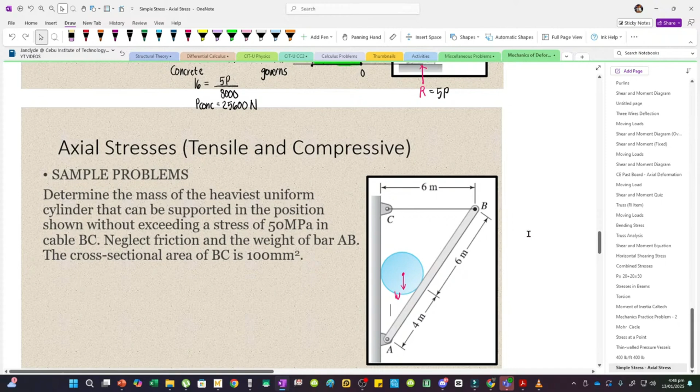So what we'll do first is draw the free body diagram for the cylinder. The cylinder has a point of contact here, and also at this point. The normal reactions for a circular body act at the points of contact. So this is the FBD of the cylinder.

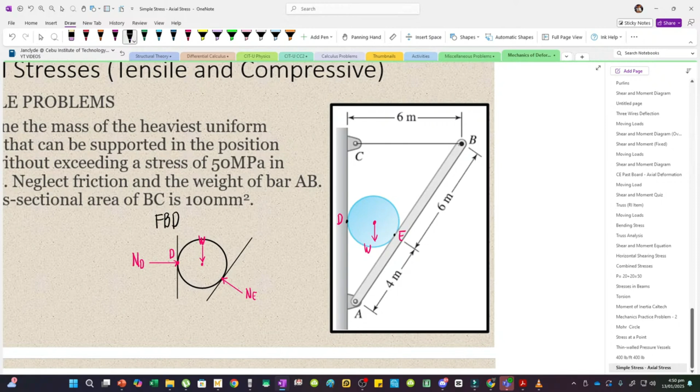So in the FBD of the cylinder, notice that we can get the normal force at point E by summing up forces vertically. To do that, we need to know the components, or the angle of NE.

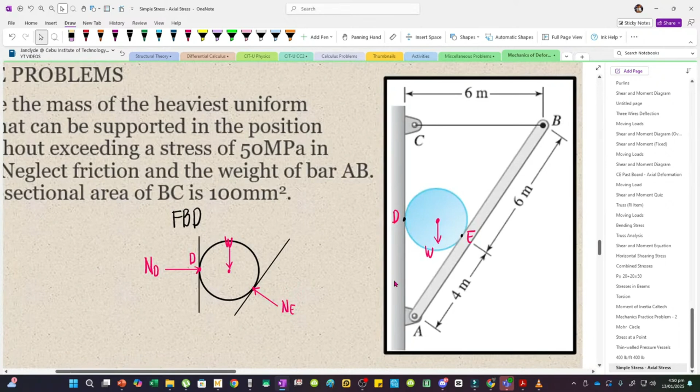Let's draw the inclined member AB again. This is member AB. 6 plus 4, so the hypotenuse is 10.

Let's draw the triangle. The hypotenuse is 10, the horizontal distance is 6.

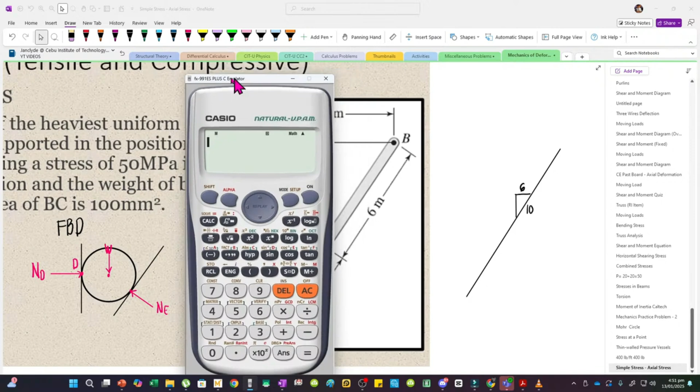And what is the vertical distance? We can get that by the Pythagorean theorem: square root of 10 squared minus 6 squared, we get 8. So this is a 3-4-5 ratio triangle.

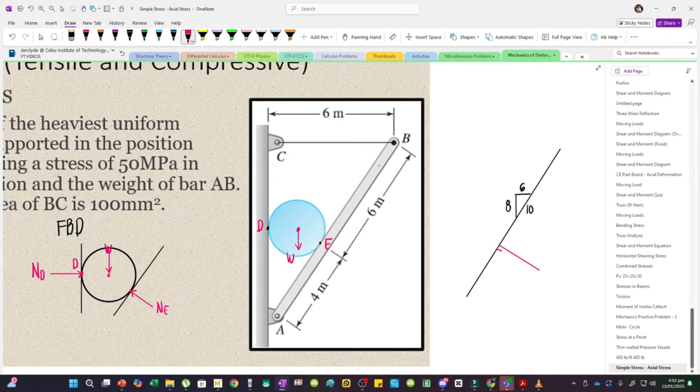And then our reaction at E is perpendicular. Let's draw it. It's perpendicular, so this is a right angle. Now if this is theta,

let me explain the angle. If that's theta with respect to the horizontal, then this is also equal to theta. I hope you agree. And notice we can draw a vertical line at this point.

Let's draw a vertical line. So if that's theta, we can extend it to see the triangle. If that's theta, I hope you agree this would be 90 minus theta, or let's call it alpha. And alpha is equal to 90 minus theta.

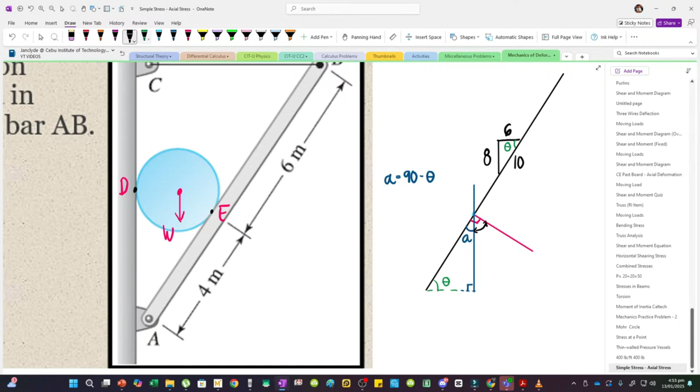So 90 minus theta, since that's a right angle, the total interior angle of the triangle is 180 degrees. So if this is alpha, what would this angle be? We know this is perpendicular, so this total angle must equal 90.

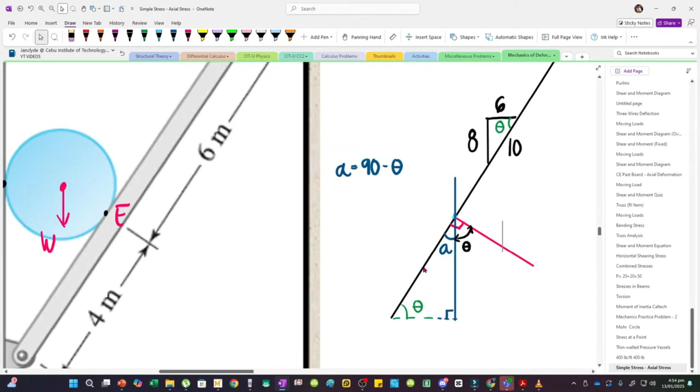So essentially, the angle with respect to the vertical is equal to theta. But with respect to the horizontal, for this line, for the normal reaction at E, this is also 90 degrees. So if this is theta, then this is alpha.

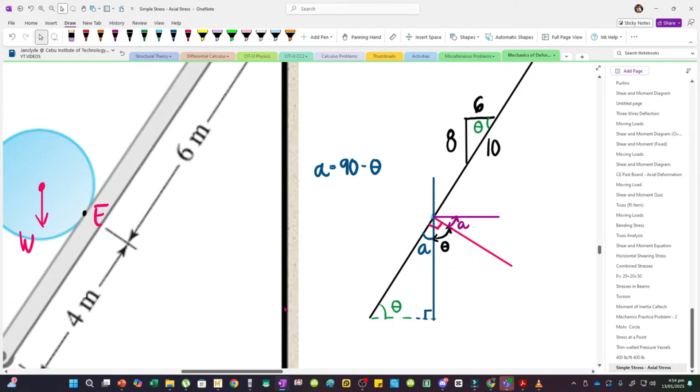Now it's by preference, whichever you like to use, whether with respect to the vertical or with respect to the horizontal. But I prefer using the horizontal. So for the reaction at E, I can draw the angle with respect to the horizontal.

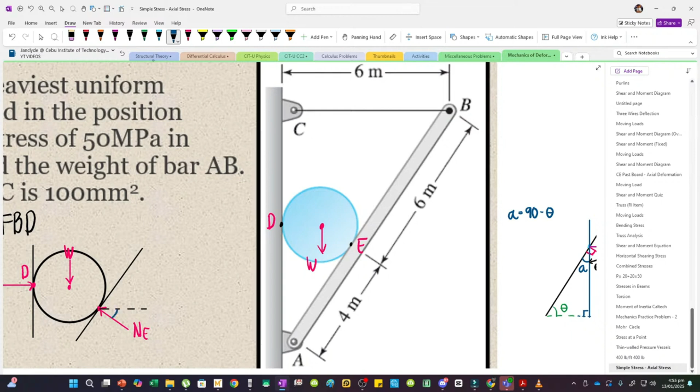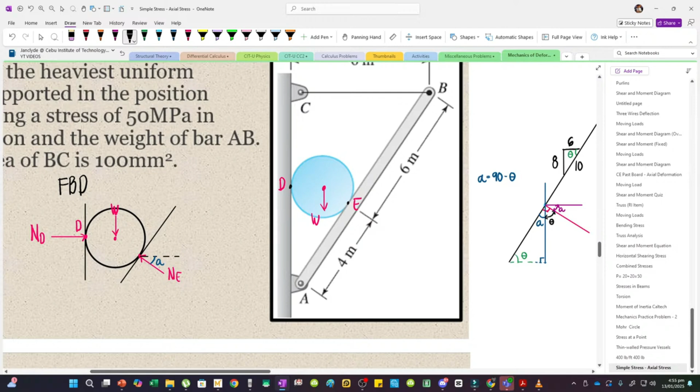Let's make it a broken line. So this angle, in a different color, is equal to alpha, which is 90 minus theta.

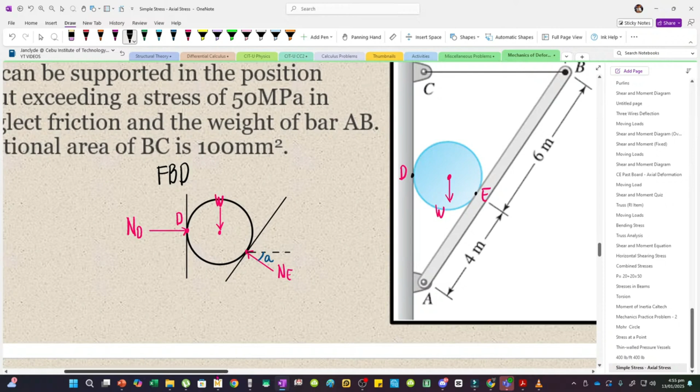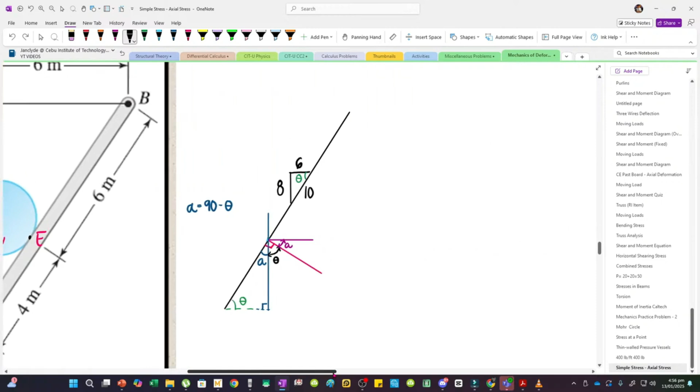Since I know alpha, I can get its components in terms of angle rather than ratio, since that's the angle I explained. So let's try to solve for theta. Theta is arctangent of opposite over adjacent. Opposite is 8, adjacent is 6. So our angle theta is 53.13 degrees.

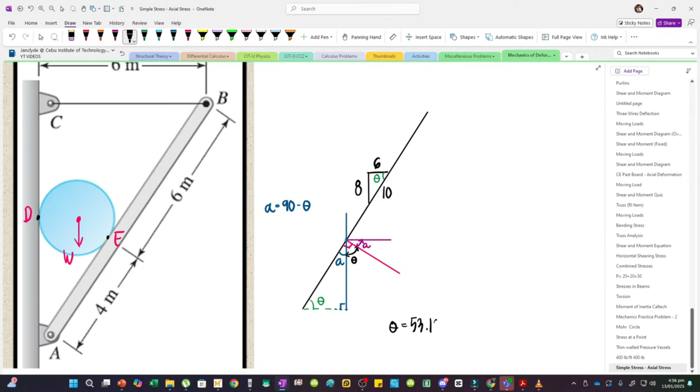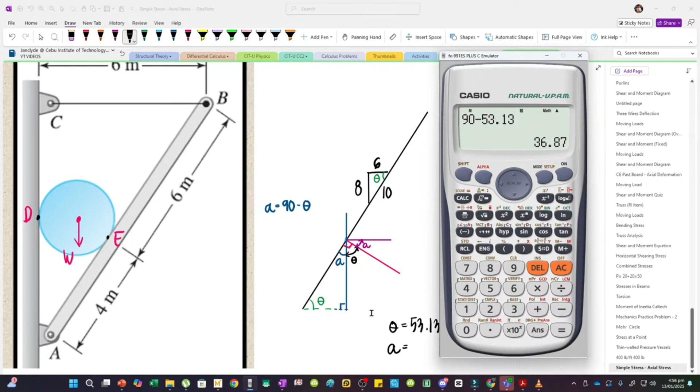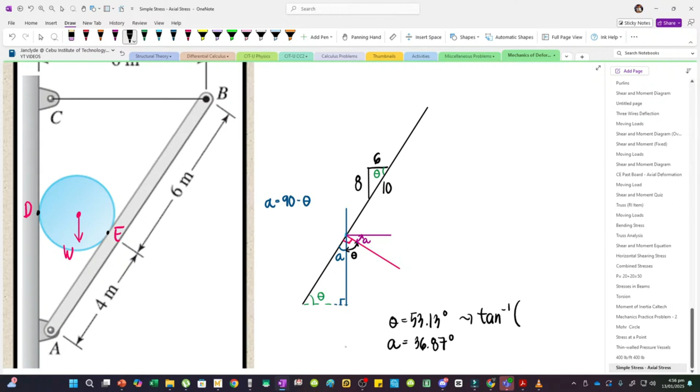And alpha is 90 minus that value, so 90 minus 53.13 gives us 36.87, which is also the arctangent of 6 divided by 8.

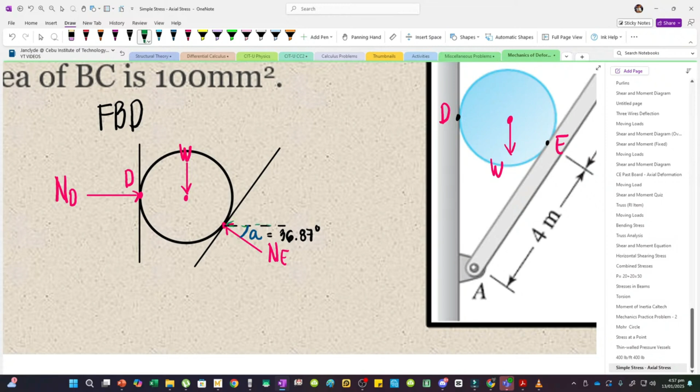So 36.87 degrees. So the normal force at E has vertical and horizontal components. This is the horizontal component to the left, and the upward direction, so this is the vertical component.

So this would be NE multiplied by sine of 36.87, since that's vertical—that's why I prefer with respect to horizontal, so I use sine for the y component, and cosine for the x component. So this is NE cosine of 36.87. I hope you agree with the components.

And then we can make an equation for NE. Summation of forces along Y equal to 0: we have W acting downward, so minus W—by the way, at this point we sum up the forces, because all the normal forces here act toward the center of the circle. So minus W, plus NE sine 36.87, equals 0. So W equals, what is the value of sine 36.87?

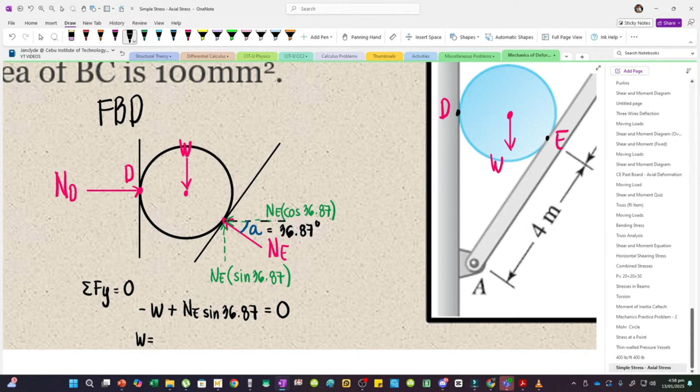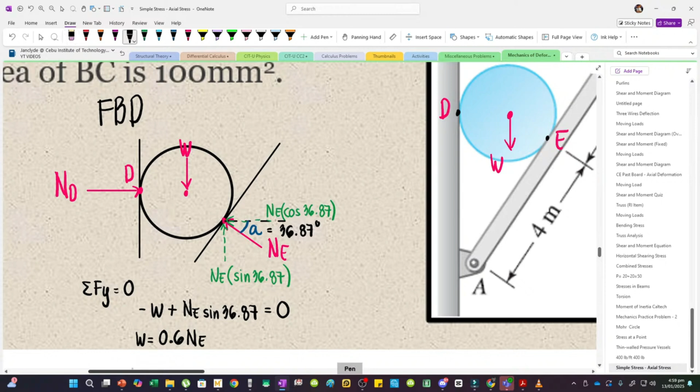That's 0.6, so W equals 0.6 of the normal force. I hope you agree. Now where does the 0.6 come from? It could also be 3/5, let's check.

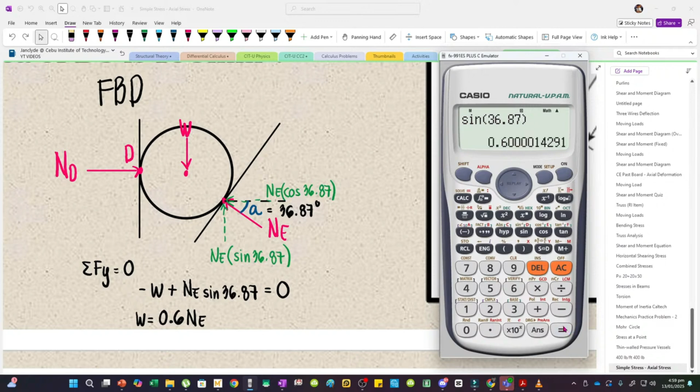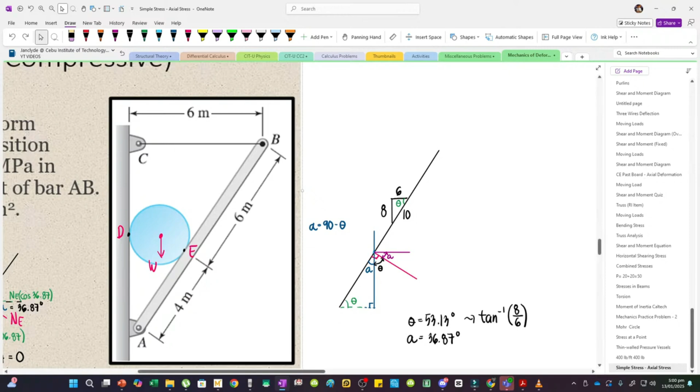Wait, is that 0.6? Sine... 0.87... for a while, 6, 8, 10. Is that correct with respect to the horizontal? This is 8/6. Okay, it's the reciprocal.

W equals... yes, because it should be in terms of NE, that's why. Wait. That's correct, 0.6 NE. But in terms of W, NE in terms of W, this is W divided by 0.6.

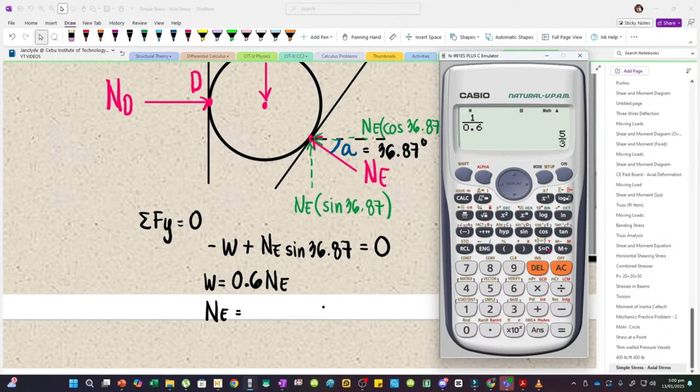NE is equal to 5/3 of W.

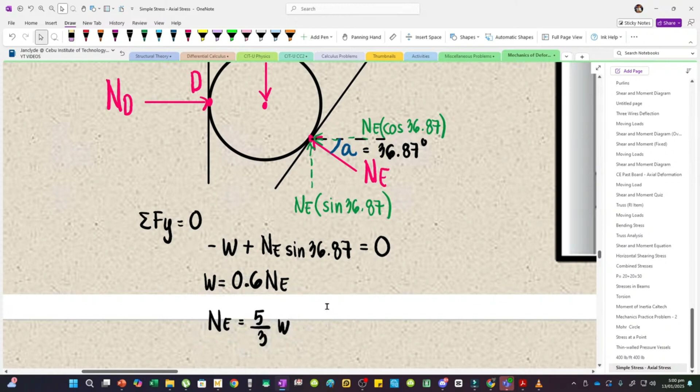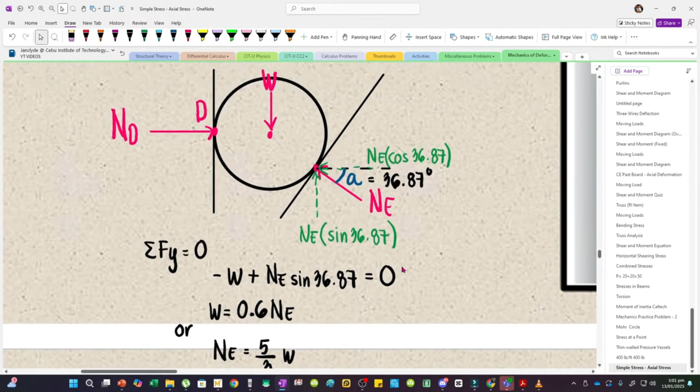Explain ko lang bakit yan naging 0.6, yung sine 36.87. Diba, yung ratio ng triangle natin is ito, pwede natin siyang i-reduce into 3, parang 3, 4, 5 triangle. Ito yung para sa angle theta with respect to the horizontal. Yung alpha kasi parang opposite lang yan, kasi diba, naging opposite siya, 90 minus theta kasi siya.

So, yung ratio pala ng triangles, 4 yung vertical, 3 naman yung horizontal. Para sa line na to, yung magiging 4, ito na, yung horizontal na, and then vertical na yung 3, and then ito naman yung 5. Kaya kapag kukunin mo yung vertical component ng NE, you would have to multiply by the vertical distance, 3 divided by the hypotenuse, which is 5. So, essentially, ito yung ratio ng triangle.

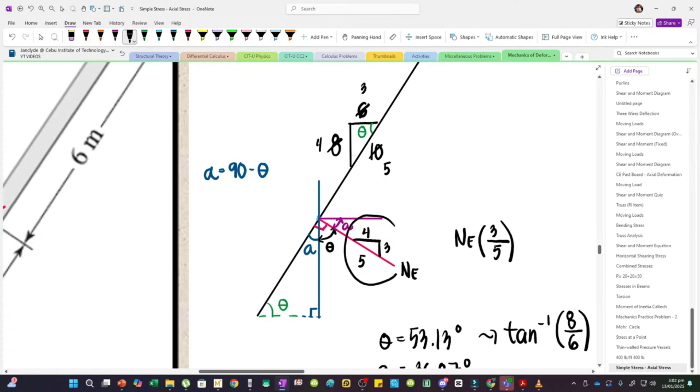In-include ko na lang yan kasi ito yung mga tinuturo ng books, lalo na sa mga solution manuals nila. But again, depende na yan sa preference mo whether you want to use angles or ito na lang, baguhin mo na lang yung ratio ng triangle.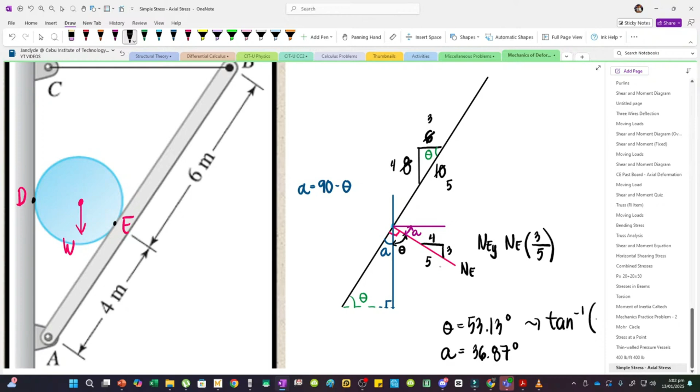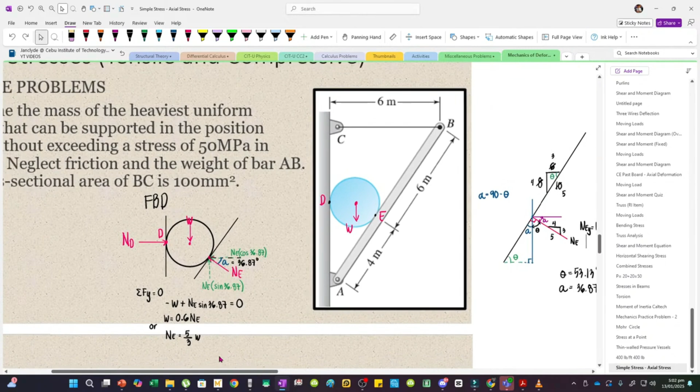Medyo mahaba na yung sidetrack natin, balik tayo sa problem. So, again yung gusto nating force is, yung mga binigay pala na allowable is for BC.

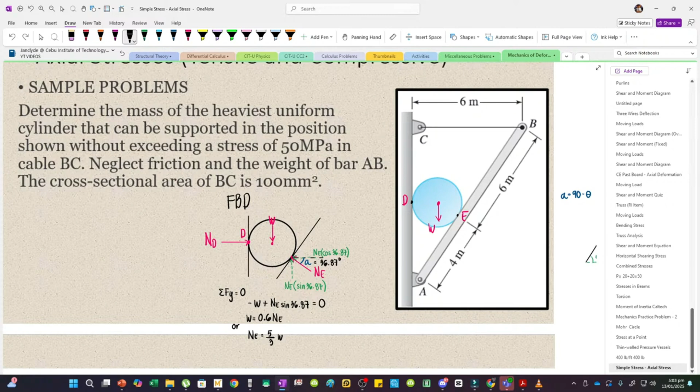So we have to draw the FBD of the whole structure din pala. But essentially, pwede mo yung i-cut. Yung cable BC, i-cut natin, so maglalabas na yung internal force BC.

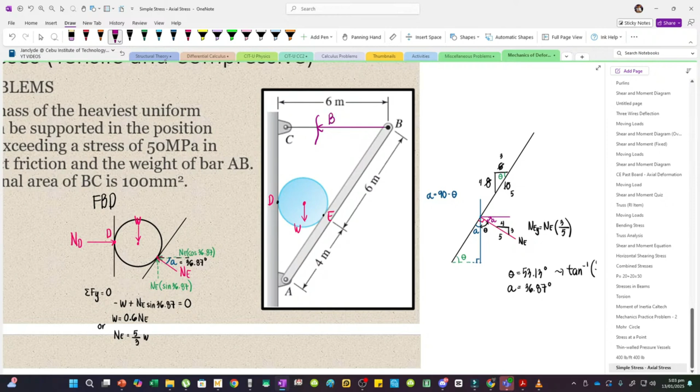So for the whole structure, ito na lang yung i-draw natin. Kasi yung reaction dyan sa hinge equal lang naman sa force ng cable. So we would have ito yung member BC, I mean AB pala yan, and then ito yung BC.

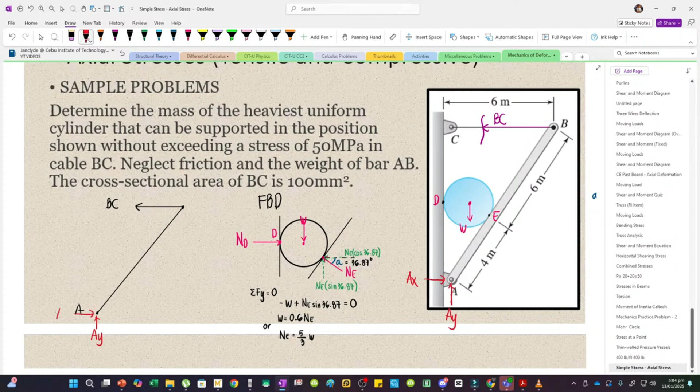And then yung hinge sa point A, diba meron yung dalawang reactions, merong upward saka horizontal. Draw ko na lang dito, AY saka AX.

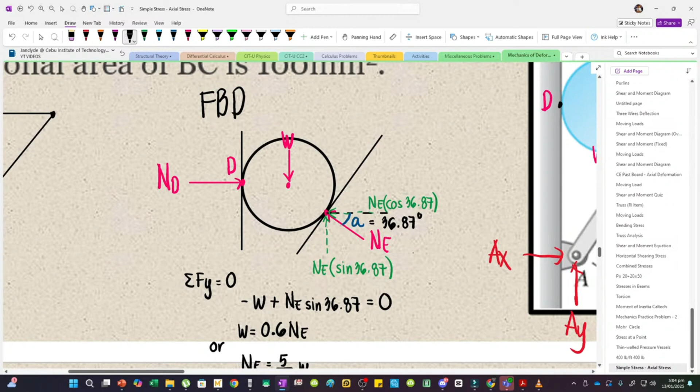Tapos, yung load dito sa NE, notice na yung reaction niya is paganyan, parang upward and to the left. So, kapag lilipat ka na sa ibang member, sa member AB na kasi tayo, opposite na yung reaction niya to maintain internal equilibrium. So, dito pala, somewhere sa point na to, yung NE is mag-a-act na pa ganito. Ito yung NE. And then still, yung angle niya with respect to the horizontal, alpha pa rin yan.

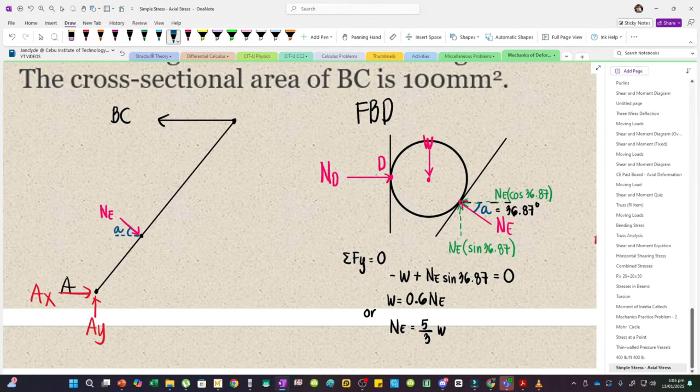So yung distances pala, 4 saka 6, 4 going to the point of contact, then 6 going to B. So draw na lang natin din yan, 4M saka 6M.

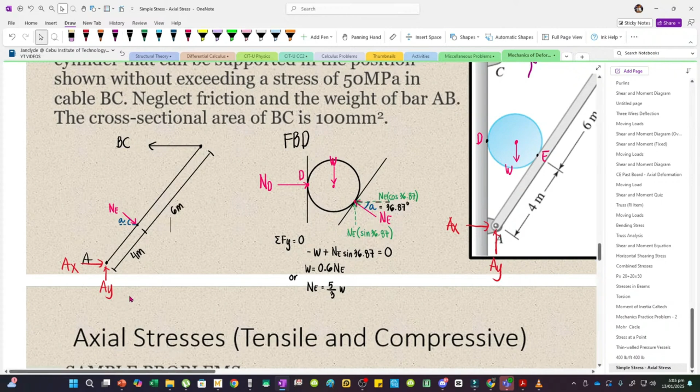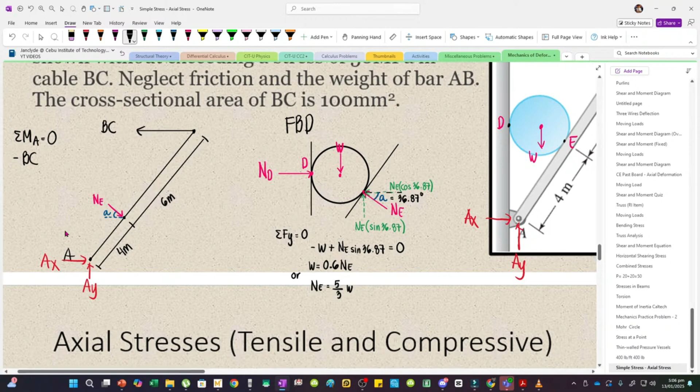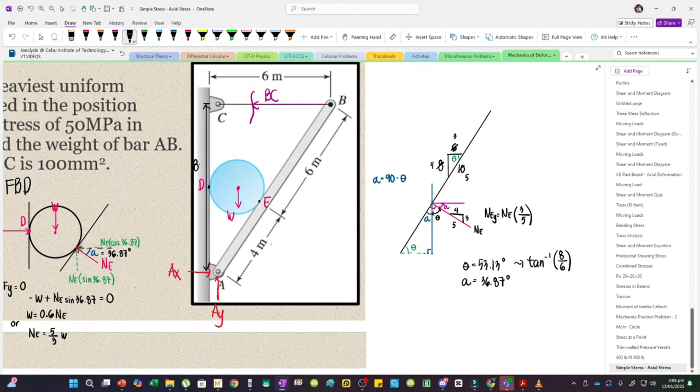Sige, so sum up lang tayo ng moments about point A para masalin natin yung BC sa equation natin. So for BC, yung rotation na makukuha niya about point A is counterclockwise, minus BC, and then ano yung moment arm niya? The moment arm is equal to 8, diba, na-solve na natin yan earlier. This vertical distance is equal to 8 kasi, 8 meters yan, so essentially, ito rin.

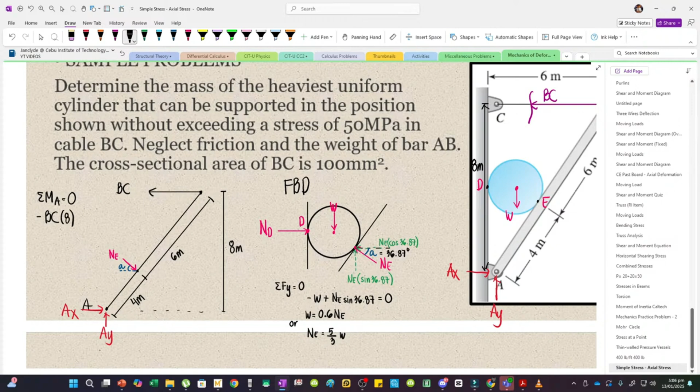So, times 8. And then, for NE, wag mo na i-component. Try to notice na yung NE, this is already perpendicular to the member AB. Lagyan ko pala ng point yan, perpendicular na yan to AB, so wag mo na siyang i-component. Automatic na yan, force times perpendicular distance na 4. Pwede mo siyang i-component, but yun nga lang, mas mahaba na yung solution.

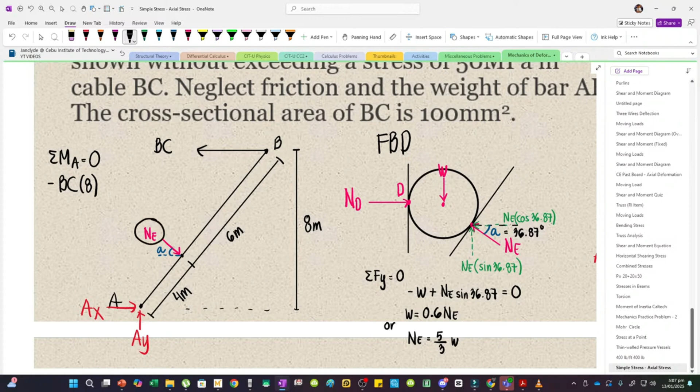So, automatic na lang, use the concept na lang na moment is equal to force times perpendicular distance. So, we would have yung NE magkukuha ng clockwise rotation about point A, so plus NE, and then our moment arm is 4, and then equate to 0.

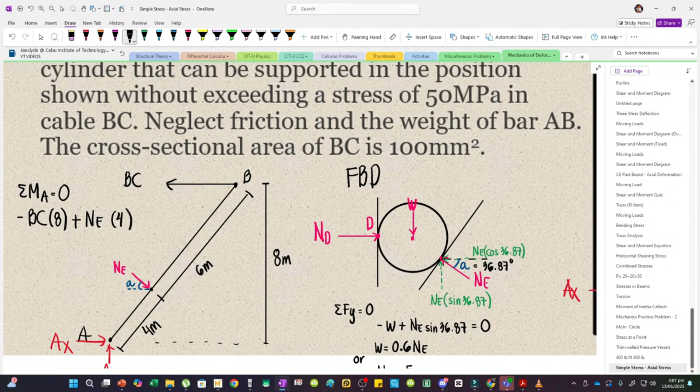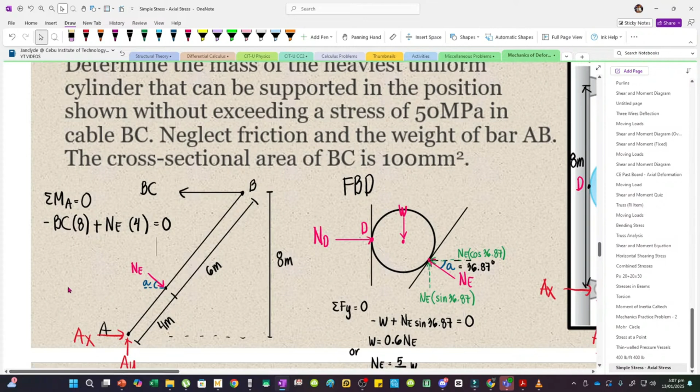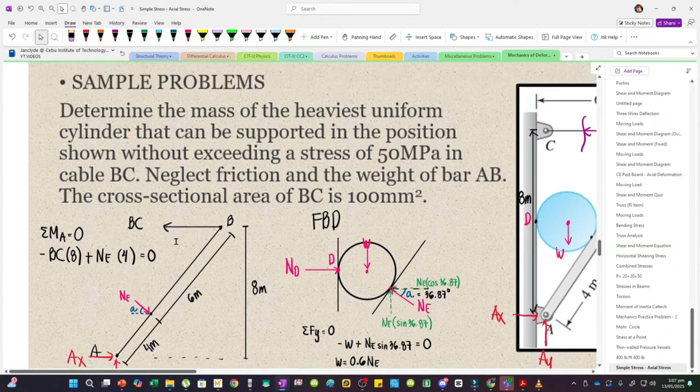Check natin kung ano yung given. Allowable stress for BC is 50 MPa, lagay na lang natin, working stress. And then yung area niya is 100 mm squared. And then alam natin yung NE

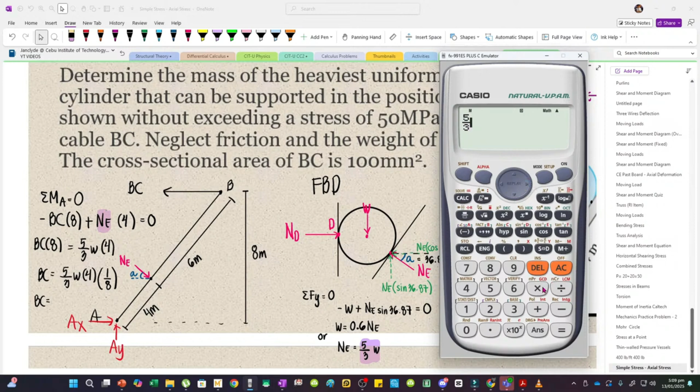Na-move na kasi yan sa kabilang side. And then BC is equal to 5/3 W times 4, and then divide by 8 yung dalawang sides, so times 1/8. Therefore, BC is equal to, ano yan? 5/3 times 4 times 1/8, 5/6, 5/6 W.

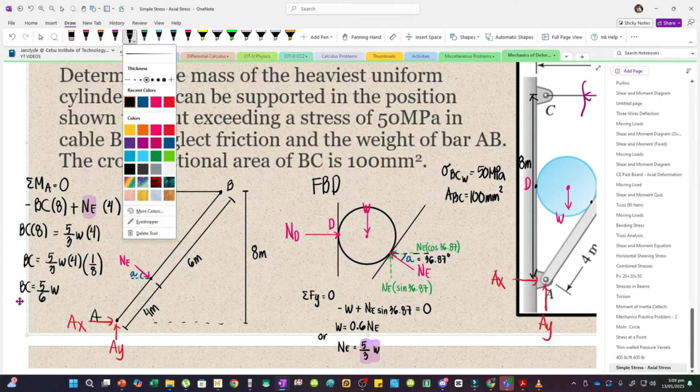Move ko na lang to. So, ito yung force ng BC. Diba? So, kapag yan yung force ng BC, then we can use stress equals force divided by area, considering the given.

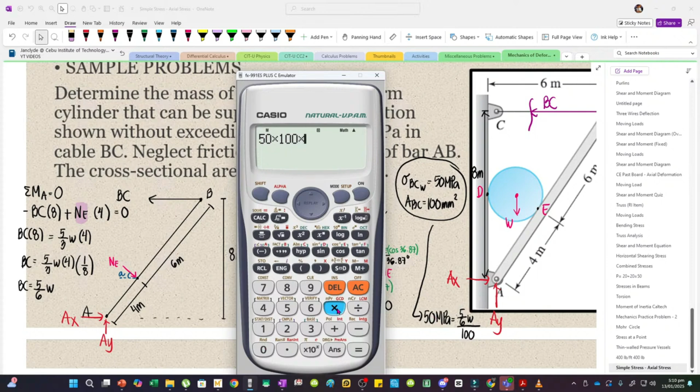So, we would have 50, dito na lang, 50 MPa, and then equals yung force na kinikerry ng BC, 5/6 W, divided by the area. Area is 100. So, masusolve na natin yung W. So, this would be 50 times 100 then times 6/5, reciprocal ng 5/6, so 6,000.

W equals 6,000 newtons. Now, naka-newton yan, pero dapat mass kasi, diba, mass is in kilograms. So, kapag i-convert mo yan into kilograms, divide this by 9.81. So, M of the cylinder, MC na lang, is equal to 6,000 newtons divided by the gravitational constant, 9.81 meter per second squared. So this would be 611.6 kilograms.

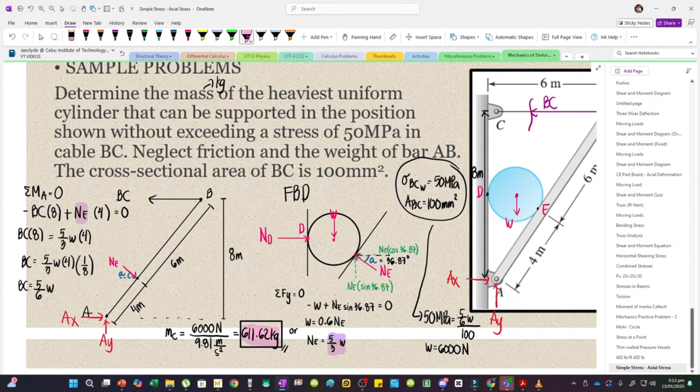0.62 na lang, and then kilograms. Ayan. So ito na yung sagot natin, mass of the heaviest uniform cylinder.